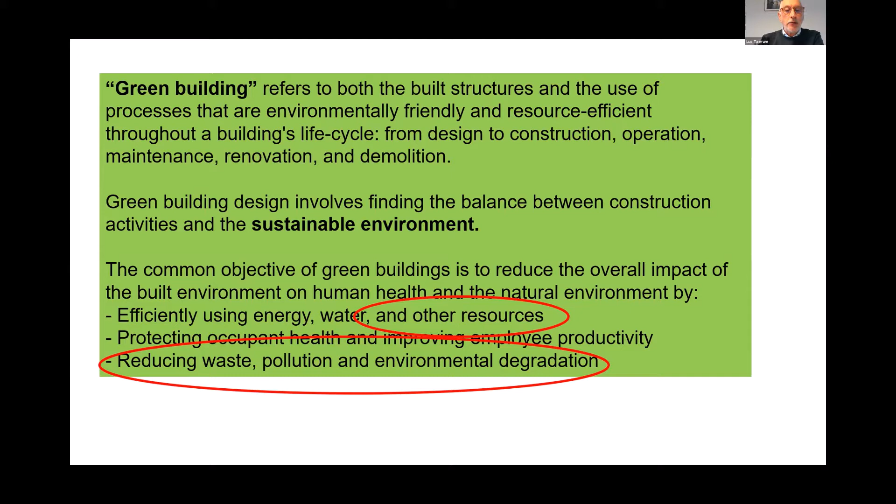Green building design involves finding the balance between construction activities and the sustainable environment. The common objective of green buildings is to reduce the overall impact of the built environment on human health and the natural environment, by efficiently using energy, water, and other resources, protecting occupant health, improving employee productivity, and reducing waste, pollution, and environmental degradation. I will focus in my short presentation on the efficient use of other resources and on reducing waste, pollution, and environmental degradation.

We must see green buildings in the sustainability framework, characterized by the so-called triple P concept, where the first P stands for planet or the ecological and environmental aspects, the second P for economic aspects, and the third for social aspects, because every measure we take has economic and social consequences. So that's what I mentioned—finding a balance between these three aspects, which is not so easy in many cases.

I also want to refer to the Sustainable Development Goals defined by the United Nations in 2015, three of which can be related to construction and infrastructure. Number 9 is about industry, innovation, and infrastructure, stating: build resilient infrastructure, promote inclusive and sustainable industrialization, and foster innovation.

Regarding sustainable industrialization in the construction sector, for almost 5 years we have established a Belgium-China joint laboratory for industrialized construction. This is a joint effort between Ghent University, Tongji University in Shanghai, and Shanghai Construction Group.

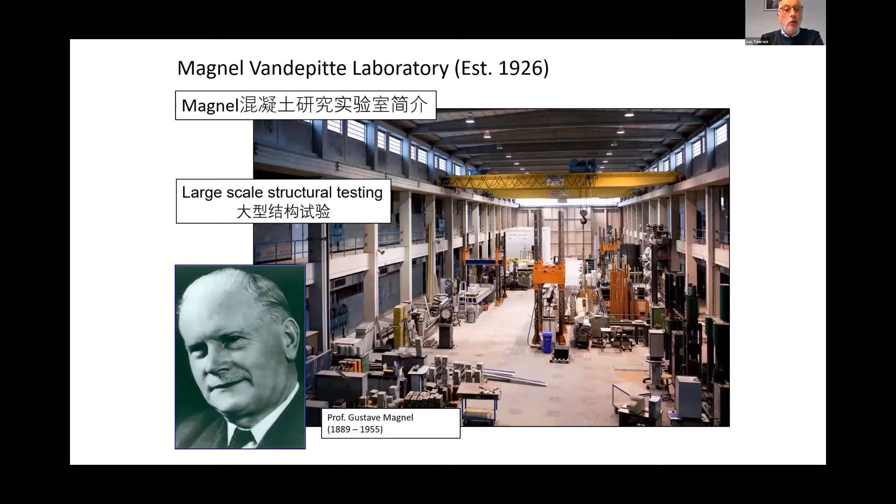At Tongji, this is mainly linked to the State Key Lab of Disaster Reduction and Civil Engineering, where they have huge facilities for large-scale structural testing. The Shanghai Construction Group is the biggest construction company in Shanghai, and was involved in the construction of most high-rise buildings, bridges, tunnels, and so on. Then there's our Magnel lab at Ghent University, where we also have large-scale structural testing facilities, as well as material testing equipment and so on.

Then the number 11 goal is sustainable cities and communities. It states: make cities and human settlements inclusive, safe, resilient, and sustainable.

What's a shock? This can be a structural accident, such as explosions, impact, or natural hazards like earthquakes. But you can use these concepts also in a wider sense. For instance, in a social environment, we can have a pandemic that occurs suddenly.

Then we have to look to the recovery - that's the resilience. How do we get back to the post-shock quality, which can be the same as, higher, or lower than the pre-shock quality. We have to look to the recovery time, linked to the rapidity of recovery. There are structural measures we can take that increase redundancy, with more investment in the system, and in this way we can reduce vulnerability.

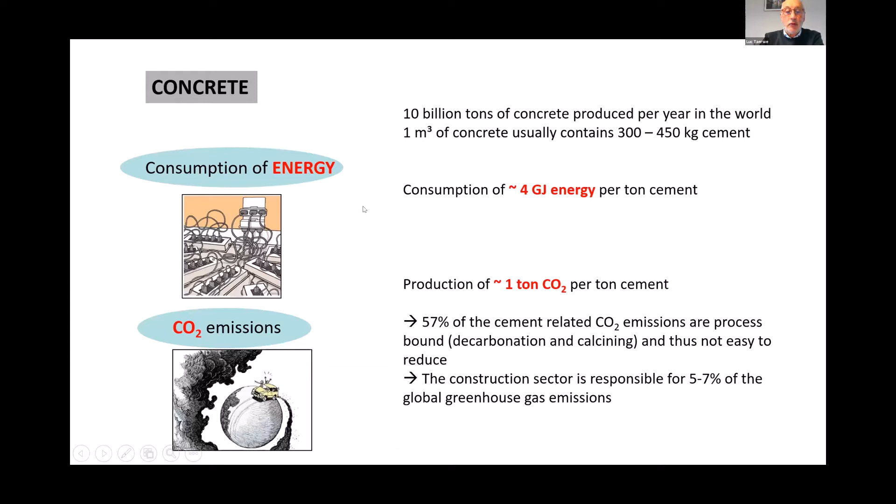So this is a huge challenge for the construction industry - not only cement, but the aggregates we use to make concrete. There are 3 billion tons of aggregates produced per year in the EU, and only 6% are recycled. This means the construction sector uses 50% of the Earth's raw materials. As for waste, 850 million tons of construction and demolition waste are generated in the EU per year, and the construction sector produces 50% of the Earth's waste.

Now, how can we deal with this problem? There have been many attempts in recent years to produce, for instance, high volume fly ash concrete in order to reduce cement. Geopolymer concrete, for instance, is concrete where no Portland clinker is used anymore. There's also the use of recycled aggregates, and self-healing concrete, where the principle is to extend the service life.

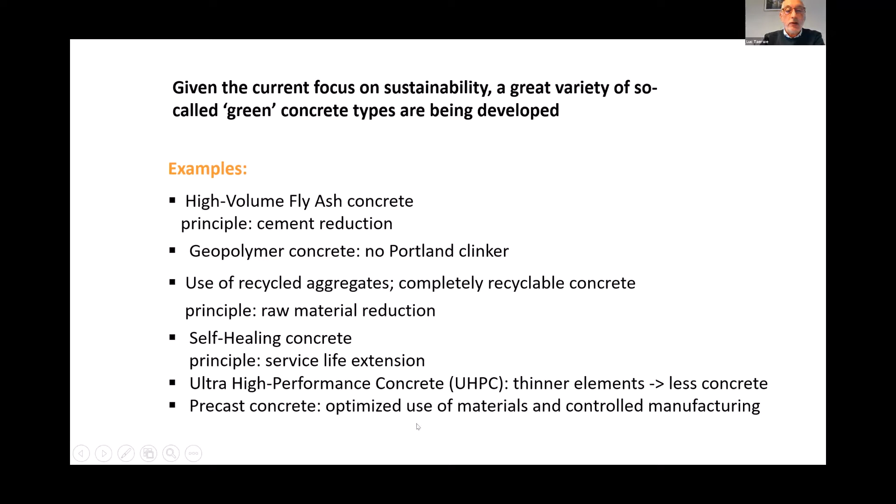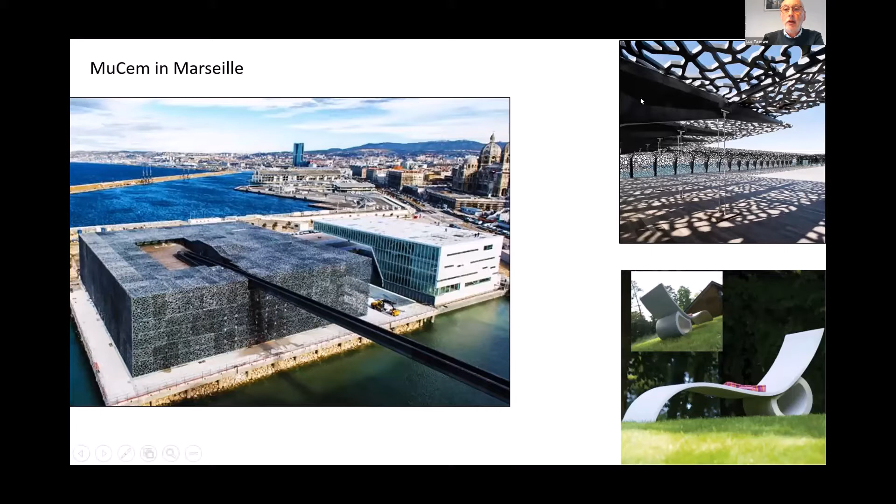Also in Belgium, we already have a couple of applications. For instance, this is a small pedestrian bridge near Brussels. This is a railway bridge in Germany. And perhaps some of you know MuCem in Marseille, where you have this filigree structure, which is really very nice.

Use of recycling: nowadays a lot of recycling waste, concrete, and so on is reused as recycled aggregates. The International Federation of Structural Concrete has recently published a sustainability statement focusing on materials, structures, construction, conservation, dismantlement, and reuse.

For instance, here you see an example: a bridge beam recently produced in Japan, where 150 megapascal strength is used, but there is no cement at all in this beam. So you see that practical applications are really possible, and we can achieve sufficient strength.

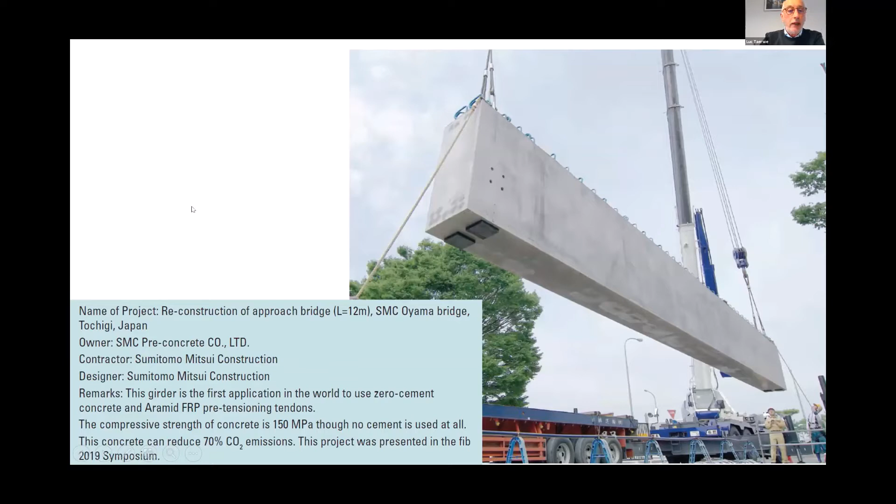Also, precast concrete contributes to sustainability. Here you see a complete overview. I'm not going into the details, but this makes me conclude that there are several possibilities nowadays to really produce environmental concrete structures. There's still a lot to do, still a lot of research, but we see these new materials and new techniques finding applications in real projects. Thank you for your attention.

Thank you very much, Professor Taerwe, for the very nice explanation of the scientific background of green building and the various green construction materials, and for your continuous contribution and dedication to the collaborative work between Belgium and China in the construction sector. Our next speaker is Professor Meng Tao from Zhejiang University, also Deputy Secretary General of the Special Committee for Construction Solid Waste of the China Silicate Society. His primary research concerns advanced materials, recycling in construction, and the durability of concrete. He will present the 10 years of cooperation between Zhejiang and West Flanders in recycling and reutilization of demolition waste. Professor Meng, I give you the stage.

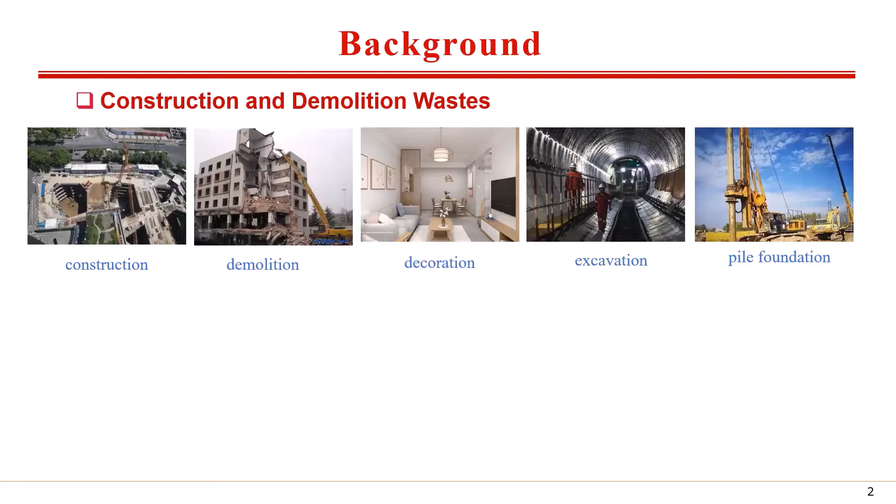As we all know, we need to conduct different kinds of engineering to make our lives better and more comfortable. However, we also bring about a huge amount of different kinds of wastes. How to treat those wastes is a big problem all over the world.

Let's first look at the situation in Flanders. The whole amount of construction and demolition waste is about 14 million tons per year, and there are 285 certified recycling installations, including 4 different treatment methods. This makes Flanders a world leader in recycling in construction, with a recycling ratio achieving 98% now.

But the situation in Zhejiang is quite different. We investigated the production of construction and demolition waste in 2016. The whole amount in Zhejiang is about 800 million tons per year, and the amount of above-ground structural waste is about 180 million tons per year - more than 10 times that of Flanders. The aggregate supply and recycled products market is quite immature, which caused the recycling ratio to be only 10% in 2016. Now it's about 25%, much less than in Flanders.

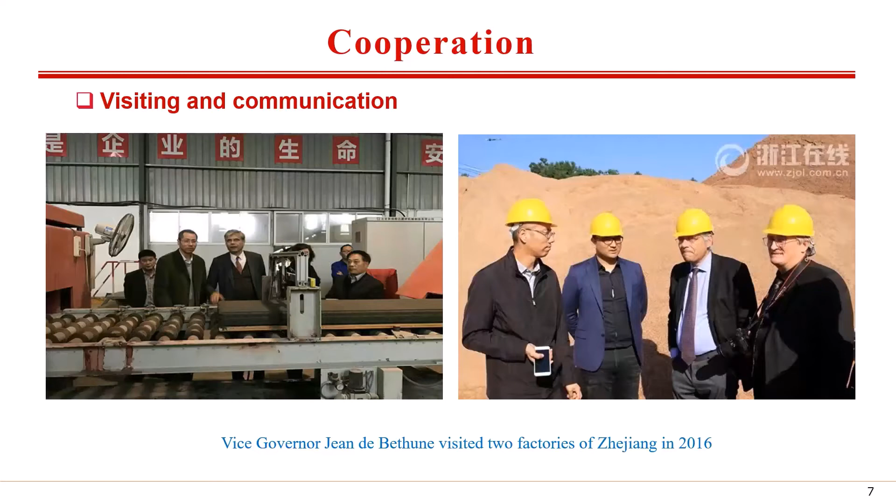In China, treatment for construction and demolition wastes started to draw attention from the government and society. Thus, the second delegation came to Belgium and visited more universities and industries, discussing with professors and managers, and started to think about real cooperation on recycling between our 2 provinces. We all think a relevant institute is necessary.

In November 2016, Zhejiang University and KU Leuven held a conference applying for the Institute on Recycling in Construction. The governor of West Flanders and the Belgian ambassador to China attended this conference and recognized our application. Then the preparation for this institute was written into the memorandum between the two provinces at the end of 2016. This is the meaning of PROR2, the institute we want to set up for recycling of construction and demolition wastes and other industrial residues in construction application.

In October 2017, 4 Belgian universities and 3 Chinese universities signed a memorandum for the establishment of the Knowledge Institute for Sustainable Economy between Zhejiang and West Flanders. PROR2 is one of the 3 main parts.

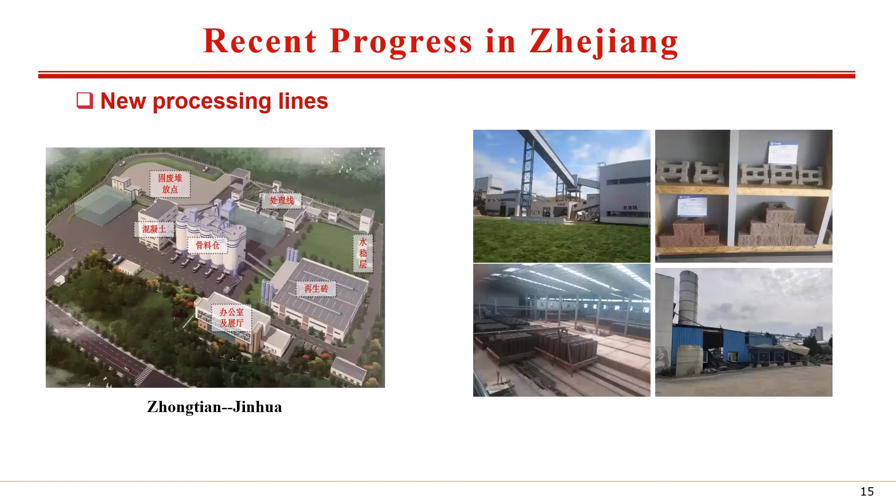This new factory located in Jinhua City has a complete set for crushing construction and demolition wastes, producing recycled aggregate, recycled concrete and blocks, and cement stabilized recycled materials.

This line is dealing with decoration wastes in Jiaxing City. We can find there are many plastic bags, ceramic tiles, wood, and other impurities inside. This greatly increases the difficulty of treatment.

So finding a suitable recycling method in Zhejiang is a new research item. The Department of Science and Technology of the 2 provinces decided to support relative research in this area, and we succeeded in applying for one. Our project is concentrated on mixed recycled aggregate, to study key technology of resource recycling and conduct demonstration applications.

However, mixed recycled aggregate is normally very weak and highly absorbent, so we need to find an effective method to strengthen this kind of aggregate. In Zhejiang, we use nano technique. We call it nano enhancement.

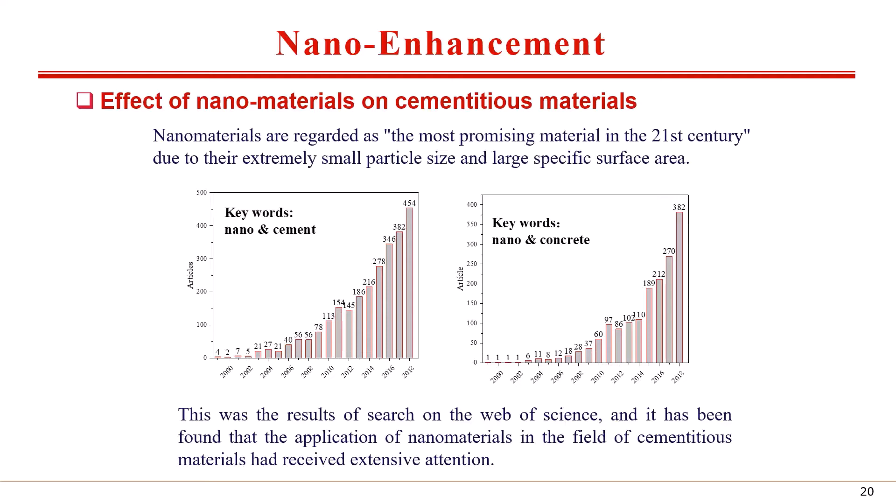In recent years, nano cement and nano concrete have drawn close attention worldwide, and we can find rapid growth in this research. From this we can see different kinds and properties of nanomaterials could cause different effects on cement and concrete. However, the mechanism still focuses on the filling effect, high activity, and the seeding effect of nanomaterials. We need to conduct further research.

We found the compressive strength of cement paste is linearly related to the orientation index of calcium hydroxide. Thus we propose a new mechanism of nanomaterials, the debunching effect. Some detailed results will be published in the near future.

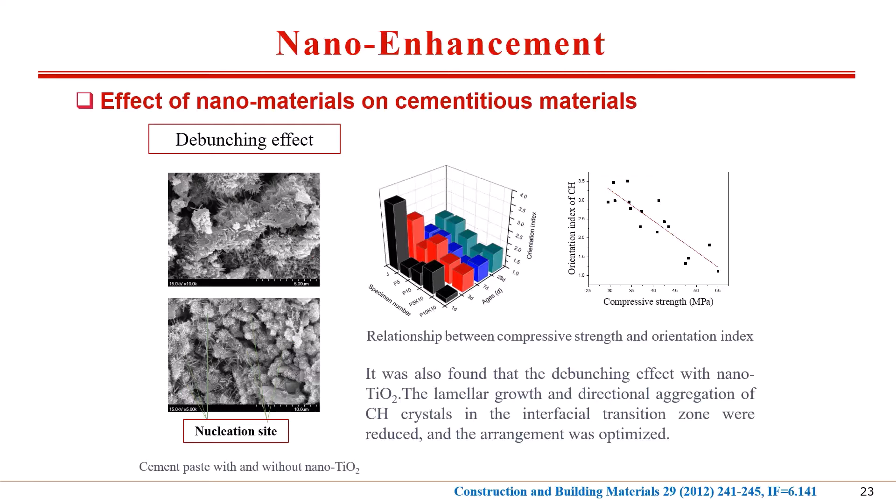We also conducted quantitative XRD experiments to find the change of composition and content of minerals in clinker and hydration products. We found this is quite different for different nanomaterials. Then we proposed the hydration model of nano-modified cement.

Based on this research, we started using nanomaterials to strengthen the recycled aggregate. 3 different nanoslurries were used in this experiment, with total solid content of nanomaterials at 2%. We found the crush index and water absorption decreased.

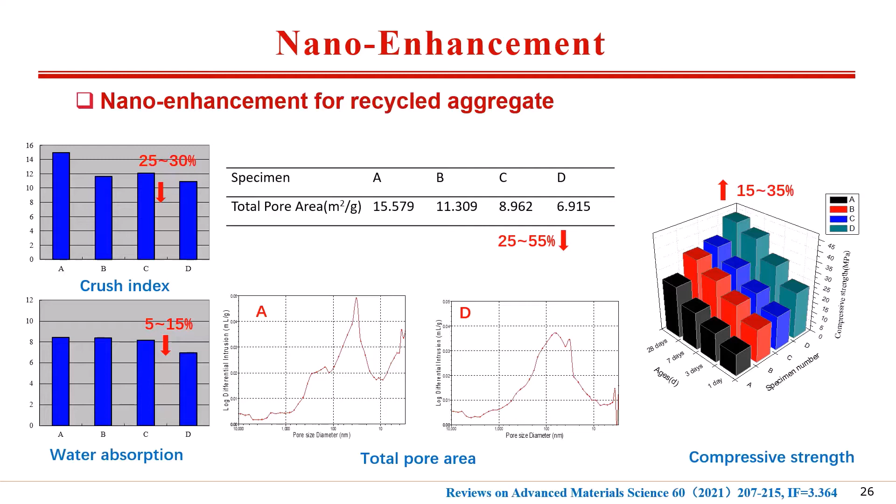The reason for these results is that the pores could be blocked by nanomaterials and hydration products from nanomaterials and cement. Thus the total pore area decreased sharply and the strength increased. This slide shows the mechanism of nano enhancement.

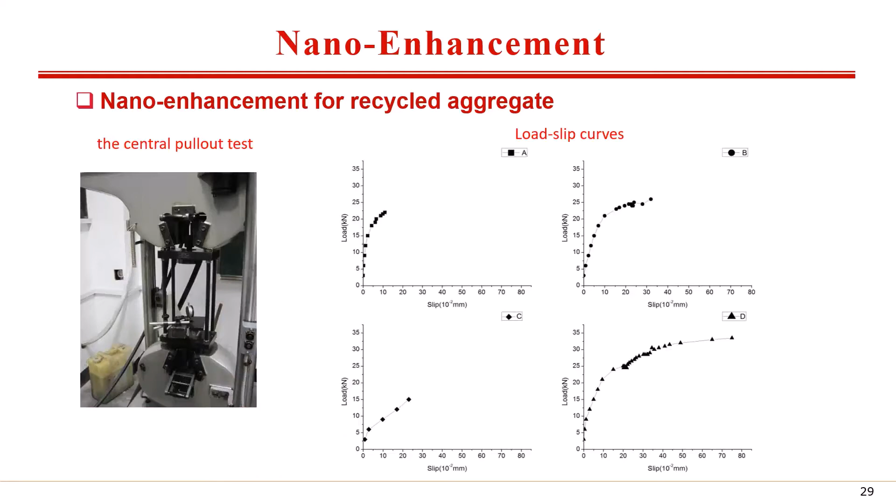Some structural properties were also investigated. We found the force and moment of the beam could be increased after nano enhancement, and the load-slip curves showed obvious difference from the control test. This confirms the effect of nano enhancement.

Now we use nano enhancement in many areas, for example high strength recycled blocks, recycled concrete, high performance recycled concrete, marine recycled concrete, and so on. That's all for my presentation. Thank you for your attention.

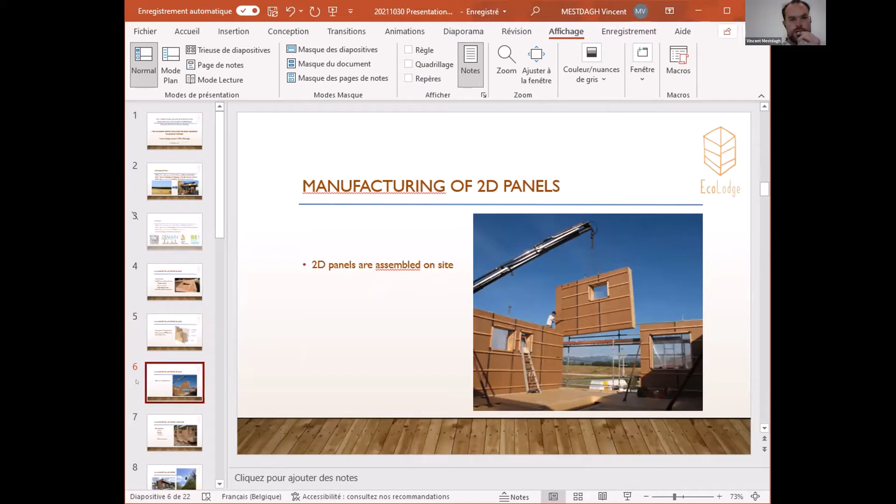What my company makes within the plant are modules, which we call 3D modules, three-dimensional modules. In this case, the waterproofing is already installed on the roof, the cladding is already installed, the windows are already installed, and sometimes we also install the kitchen and bathroom and other elements. Those boxes are shipped to the job site by truck, or by train to move them so we can assemble them on site. It's very fast, and the big advantage is that the straw and wood never get in contact with water.

Depending on the model, it takes between 15 and 60 days to manufacture the 3D modules. On the job site itself, we need one day to make the foundations, and another day to assemble all the modules together. So basically, in the morning you have nothing, and at the end of the day you have a building there on the job site. If it's not installed in advance, other contractors are welcome to install the kitchen, bathroom, and partition walls within the building.

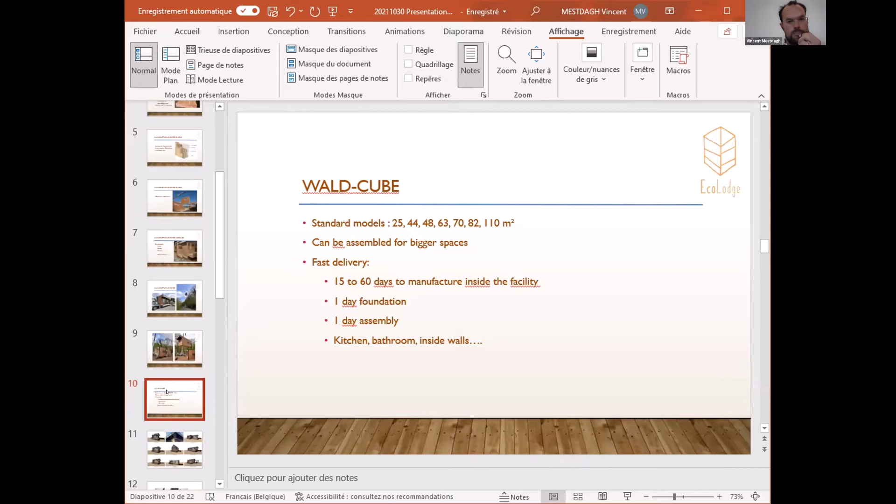This is a general view of our main models. You see we can put them together to make bigger spaces, and the smallest one, we call it the 25.

This is another one. This is a doctor's office next to his house, which is the model 30 because it is 30 square meters.

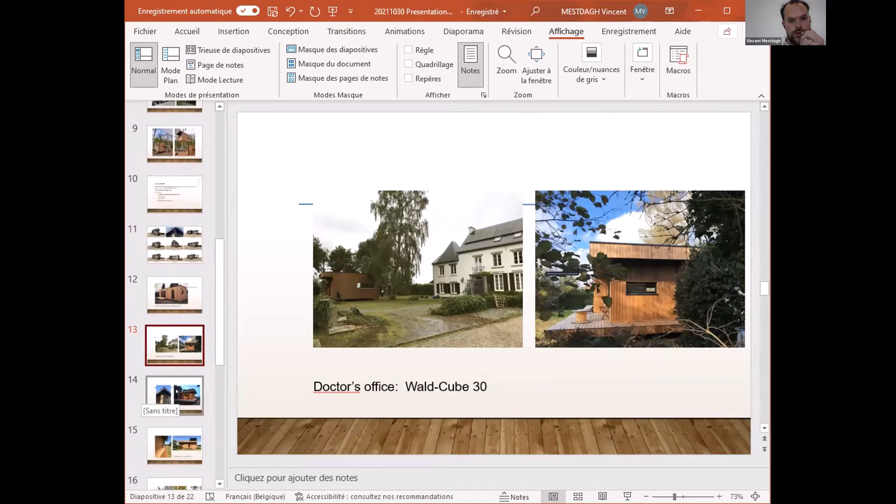This is a vacation place and the surface is 44 square meters.

This is a training center, a bit bigger.

This is a single family home which combines two sizes of Wald-Cube, 82 and 25.

This is a vacation village that counts 22 units and are all made of Wald-Cube 44.

And we work on eco districts, which is becoming very popular, where people want to enjoy a smaller place to live, a very green place, and also share maybe crops they can grow together, and they share cars and so on.

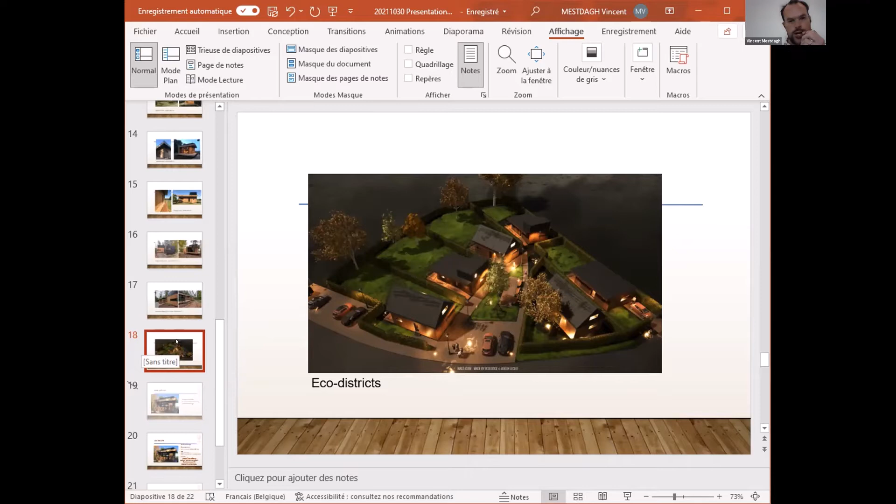So at the end, what we offer are net zero energy buildings made of green materials. Wood and straw are the main materials.

And not only are they green, but they come from very close by. So 95% of the materials are coming from a distance lower than 200 kilometers.

And wood and straw don't need a lot of energy to be ready to be used as building materials. Moreover, they can be used as CO2 reservoirs.

Another very interesting feature of those modules is that 95% of it is reusable for new buildings. We have done that for centuries in Europe, to reuse wood mainly for roofing, but also sometimes as structural elements for some smaller buildings.

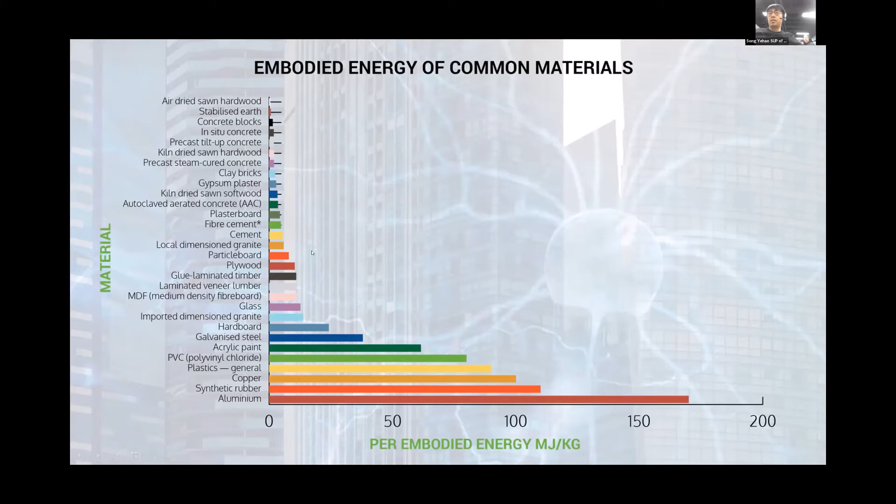In ancient China, we sometimes pay much attention to the harmony of mankind and nature, which means not all buildings must be necessarily enveloped. So we have open space, open view, together with nature, and bamboo could play an important role in that field.

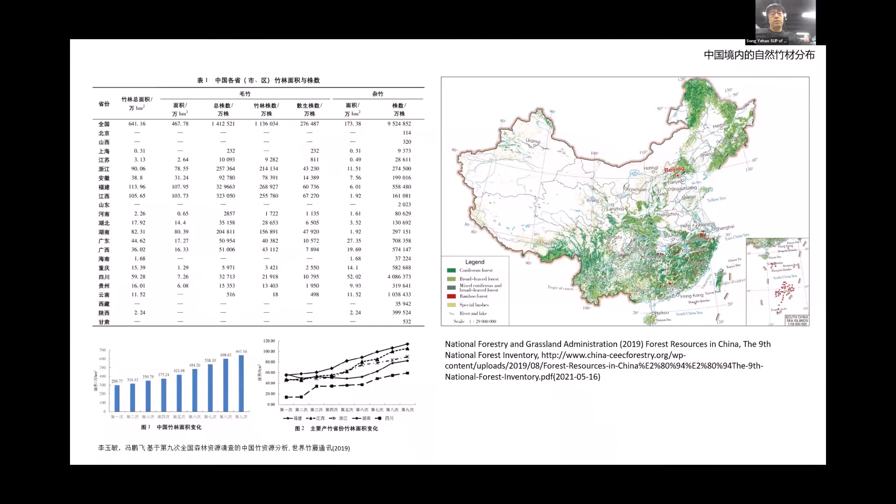That's the distribution of bamboo resources in China, some microscope research on bamboo as a material, and also a lot more ways for bondage, for bond and for joints of bamboo.

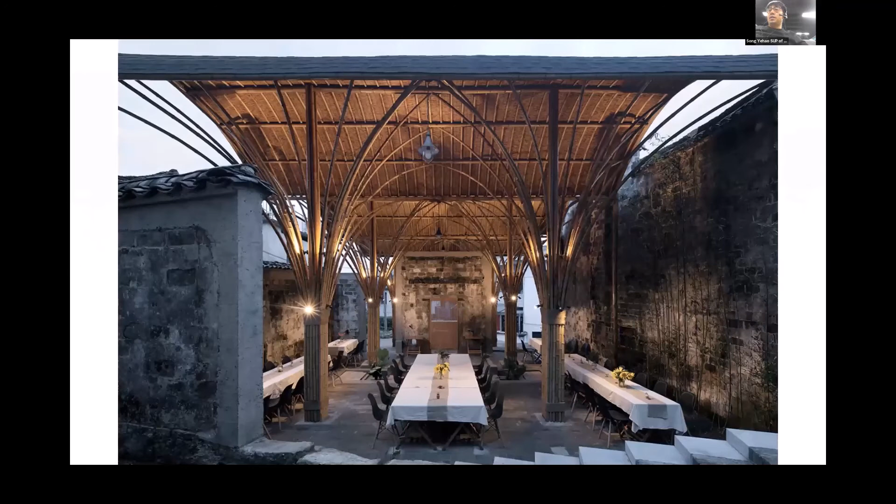The first case for us is what we call the village lounge, for villagers to do something together. It's a retrofitting project on a totally abandoned family house. With bamboo, in a very short period of time, we provided villagers with something they are really fond of, and thanks to their devotion, the villagers are not only the owners but also the builders of this small project.

So this was the first time we tried bamboo as a construction material, and we came to understand some principles for bamboo as a construction material, and also both its advantages and disadvantages.

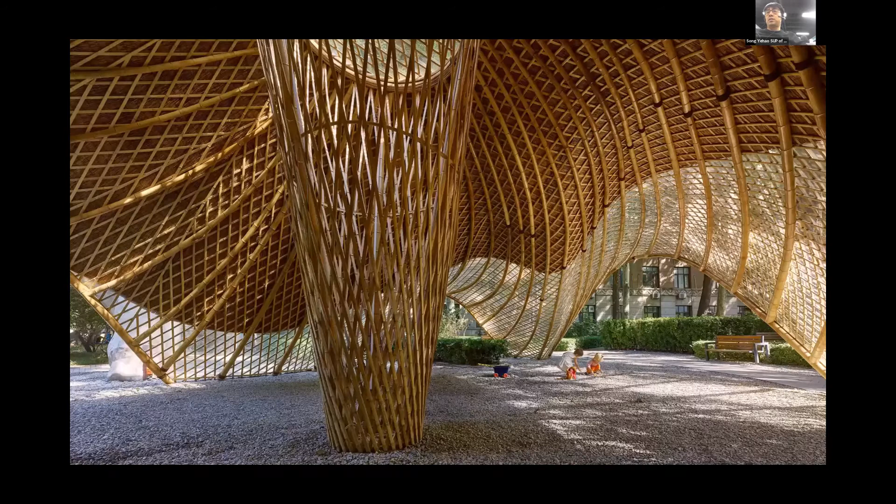After that, we have another small pavilion in Beijing, at the Beijing Forestry University, not far from my university. It's a kind of information pavilion, and a lot more events could be done there, for opening ceremonies and also for daily life of old people and their grandsons and daughters, and also for students and professors in that university.

We have a lot more architectural thoughts, but that's not the particular point for this presentation. We pay much attention to the environmental factors of the surroundings, like the acoustics, the accessibility of the building, and also the context—we call it urban context, the whole thing around it. We did a lot more research, architectural way, and after that it's something like that.

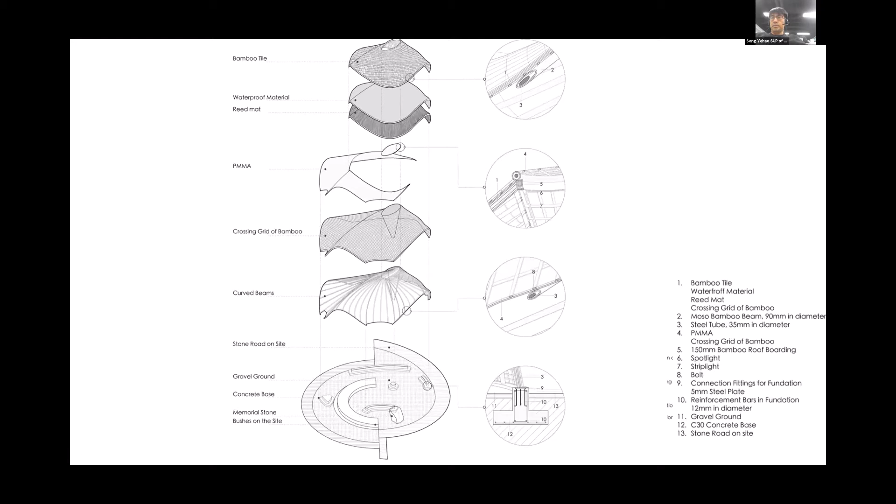We do a lot more research on the joints. Talking about joints, we're trying to connect each and every bamboo with a traditional way and with a modern way, with the help of nails, and do the analysis for the displacement of the elements, trying to combine something modern together with something traditional—which means the craftsmanship—and also the events that were going on there.

Kids definitely are fond of this pavilion. They can exploit the extremes of the building. They love that place for sure. Students also, and elderly people together with their grandsons and daughters, all in a tranquil atmosphere.

After that, one of the latest bamboo projects of our office is the tea market in Fujian. Fujian is famous for at least one thing, the tea market—a lot of teas come from that place. In architectural context, it's also very famous for rammed earth buildings, traditional rammed earth construction, and maybe it's something special, but the structure of bridges there is quite particular, built with timber in the traditional way. So that's the surrounding context.

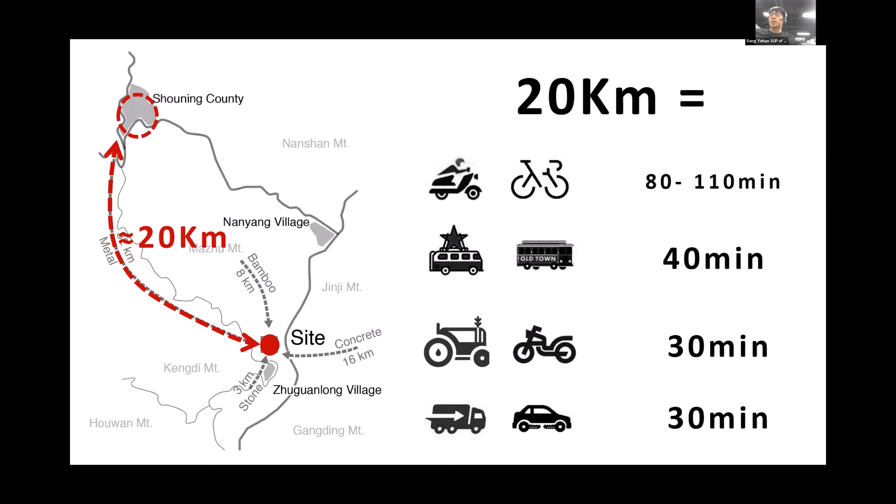We're trying to find everything within a limit, which means 20 kilometers—we try to source materials less than 20 kilometers away. We found the rammed earth just surrounding, not far from the construction site, and also the traditional Chinese timber bridge very near to the site.

Talking about rammed earth, it's something with very low embodied energy and a long history. We did reuse research on that, on abandoned houses with timber, and we made full use of them again in the building, and also reused abandoned broken stone plates, a kind of waste. We did a rough calculation for the life cycle material and carbon emissions, trying to find loops for every material.

Another thing, last but not least, of great importance, is the craftsmanship. We ask local people to do something for themselves, which follows all the principles of our design. So they are doing something for themselves.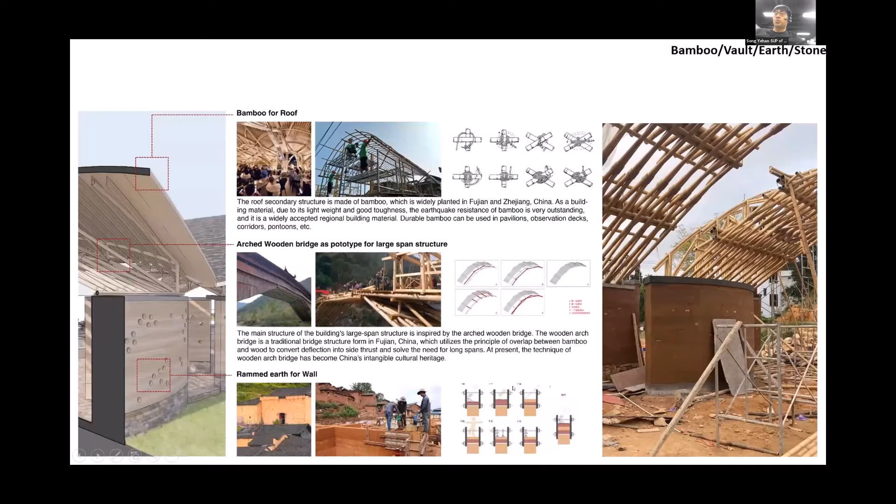It could be a tea market under a vaulted bamboo roof, which learned much from the traditional Chinese timber bridge. And again, the joints, the coverage for that, traditional craftsmanship for the rammed earth, starting from reuse of the stone, and then local people doing it for themselves.

Two workers could make a wall in two days. That's quite fast. They're doing that for themselves with joy.

That's the timber bridge nearby, several kilometers away from the construction site. We did a comparison with the rainbow timber bridge, and also Leonardo da Vinci did something for that system. That's a traditional Chinese system—the old timber bridge with hundreds of years of history.

Rainbow. Chinese must understand the significance of that traditional Chinese painting within the capital city of the Song Dynasty, with the rainbow bridge made of timber.

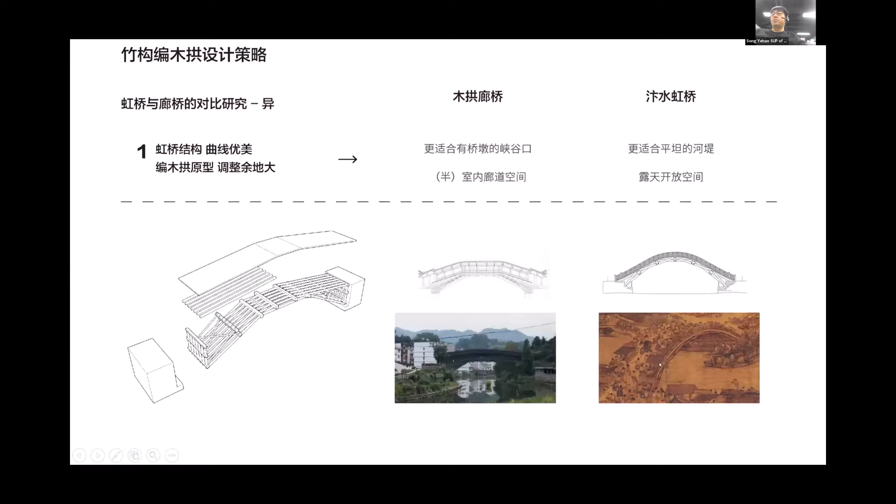So we learned something from that and tried to do a comparison with the traditional timber bridge and the rainbow bridge, and then did a lot more analysis and design work for that.

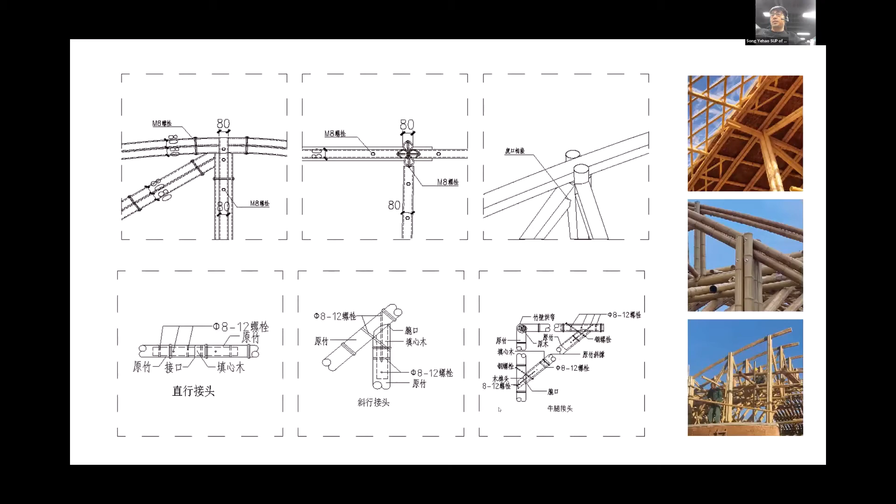And finally we have our own particular woven bamboo bridge. It's not for a bridge, just for the coverage of a huge span, so it's kind of a roof. We did the detailing, joints, detailing design, and under construction we did experiments to test if it works or not.

After a very short period of time, 30 days or something like that, the tea market was done, finished, accomplished. So that's a rendering for our research, and gradually done. That's the reality after accomplishment.

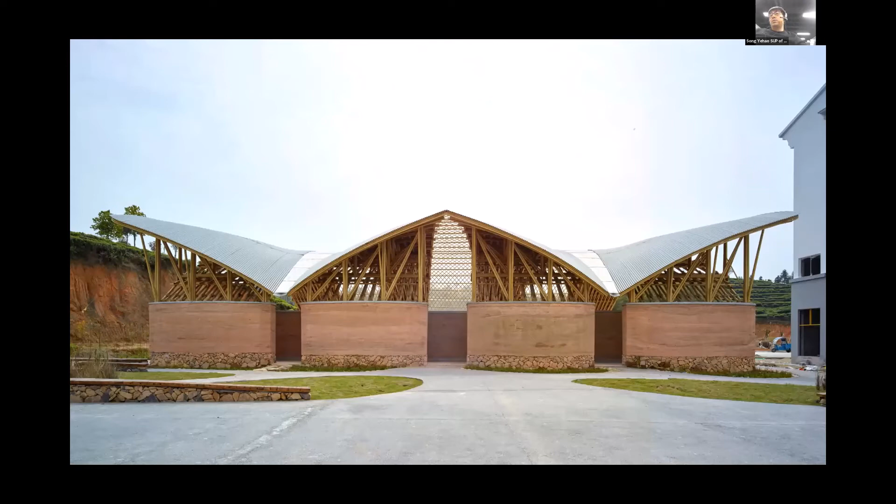And also for users less than 20 kilometers away, we are doing something for local people, not for tourists only, but also for local people. Why should they not enjoy this kind of thing? So we did a lot more research and investigation into local people's habits, hobbies, and also events and festivals, and tried to provide some kind of multifunctional space for them.

So it could be something — that's the vision. It could be a cinema for movie night, could be a grocery for daily life, and could be a tea house for everything.

That's quite special, they have this kind of feast. On a particular day, each and every family will provide dishes and just move to the street, and they will invite all the guests or villagers to enjoy their dishes.

So after the accomplishment of the tea market, they have a regular place. It could be against the sunshine, against the rain water, or whatever might be disturbing.

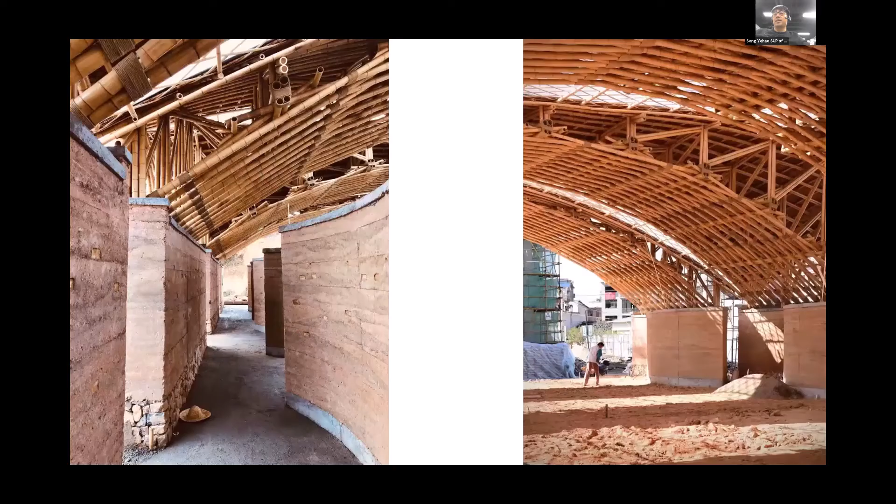All that's under construction, during the construction course, and local people, the villagers, are curious about the material, bamboo.

Terrazzo, yes, on the ground. Terrazzo is part of the reuse of the broken stone plates. We knocked it again into small pieces and then made it part of the terrazzo, so it's a kind of dark red color, which is the color of the stone.

And also another part of the broken stone plate is used for the pavement.

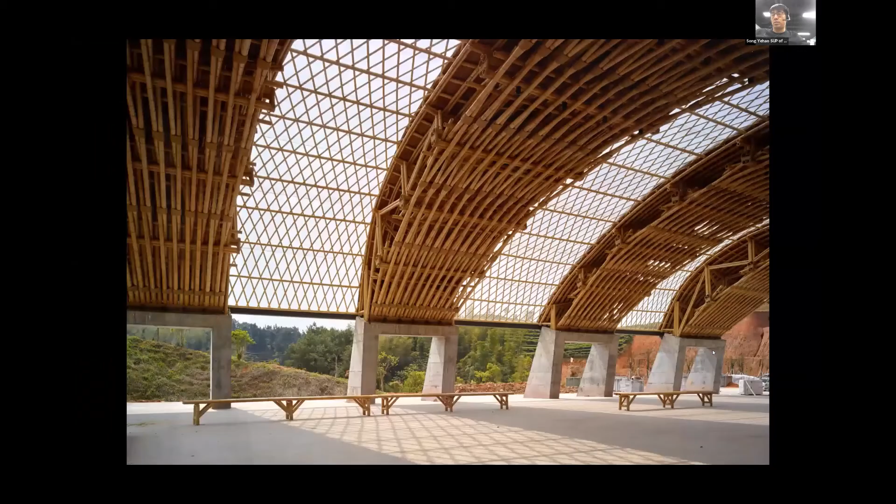Rammed earth wall — we inserted several timber pieces inside of the wall to make it possible for the villagers to nail something onto it, because rammed earth cannot bear the load, but the timber can. So that's a side of the building.

Or reuse of the abandoned timber for landscaping, for stools, for chairs.

Yeah, you can see the terrazzo.

And we do have a lot more architectural ideas and concepts, except for the structure system. We did a lot more detailed research to try to make it more elegant, more — even I would use the word beautiful. It's not common for an architect to say something like beautiful, but we are trying to do that.

Very elaborate thought. Yes, that's at night. Even for lighting, we invited the top consultants in China to do something for the local people.

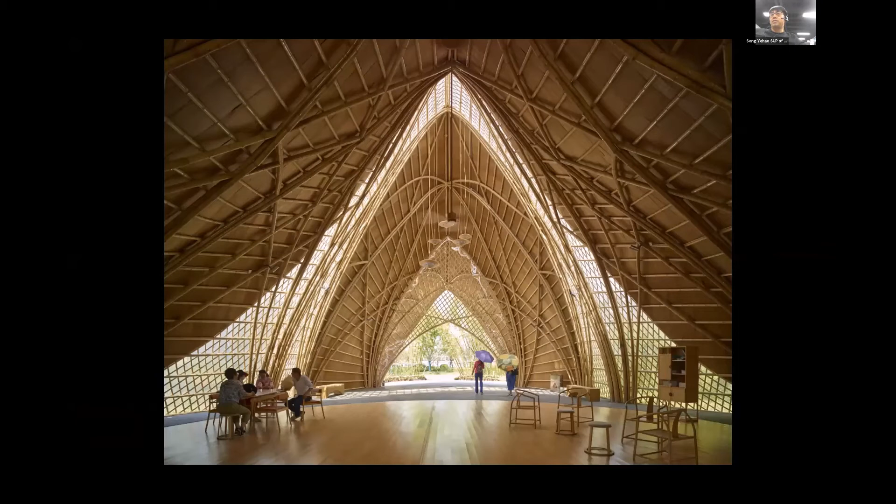And the Imba Pavilion is the last bamboo project for our office. It's a kind of small pavilion for an expo in Yangzhou. We made it look like a fish — fish means something good for Chinese people, so we tried to make it something that could be used for a wedding or a kind of ceremony. It could also be a multifunctional thing.

Yes, we also did a lot more comparison for the structural system and for calculation, and after that we tried to finally make up our minds to find one optimized solution for that.

Just a displacement or a lot more terms for that, but that's not the most valuable part of the design — it's the comparison, you know, always painful to make up your mind for a design.

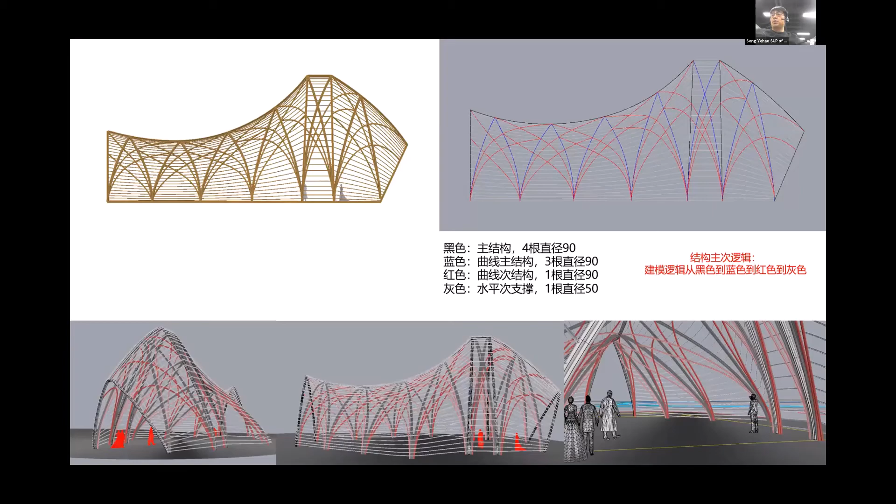That's also kind of the joints and design part, and you can say the size, the dimension. That's an adult, maybe 1.7 meters, you could say.

Professor Song, very nice presentation, but yes — you have half a minute left.

Yeah, I'll just go through slides. Okay, thank you, thanks, because it's something very easy to understand.

So, okay, another one is about bridges — just slides. It's also for villagers, for local people, even for relatively poor people. It could still be something sustainable, depending on the intention of the design and the sake of beauty.

Okay, that's all. Thank you. Thank you very much, Professor Song. It's a very, very nice presentation. It's really great to see the beautiful and very artistic bamboo structures. I wish the audience and myself will have the opportunity to see more in the future. So thank you very much. Yeah, thank you, thank you.

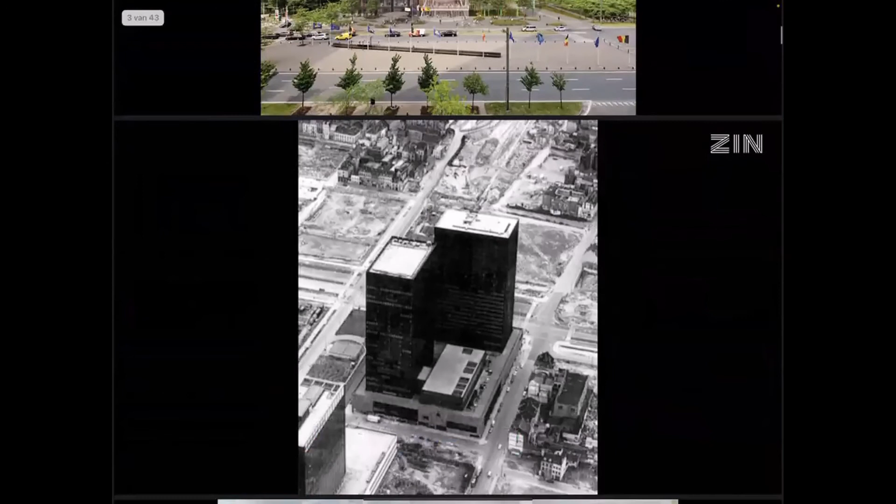Yeah, this is actually the perspective of the building on which we are involved today. It's under construction, this is a rendering of the future project. We are actually in the high-rise district next to the city center of Brussels, and it has been one of the first high-rise towers in the 60s, in 1960. So this was the former World Trade Center in the city center of Brussels. And this is a photo of when it was constructed 50 years ago.

And it was actually part of a bigger master plan and an American vision for Brussels to start constructing towers in a high-rise district. And today it's evolved into an area with a lot of towers next to one of the most frequented train stations in Belgium. It's been an area in full transition.

There is something going wrong with the text, but I will explain. The area was for a long time an area with monofunctional office blocks. It's been an area with a lot of governmental administrations, and it's been regarded as an area with not a lot of life in the evening when people in the offices are gone.

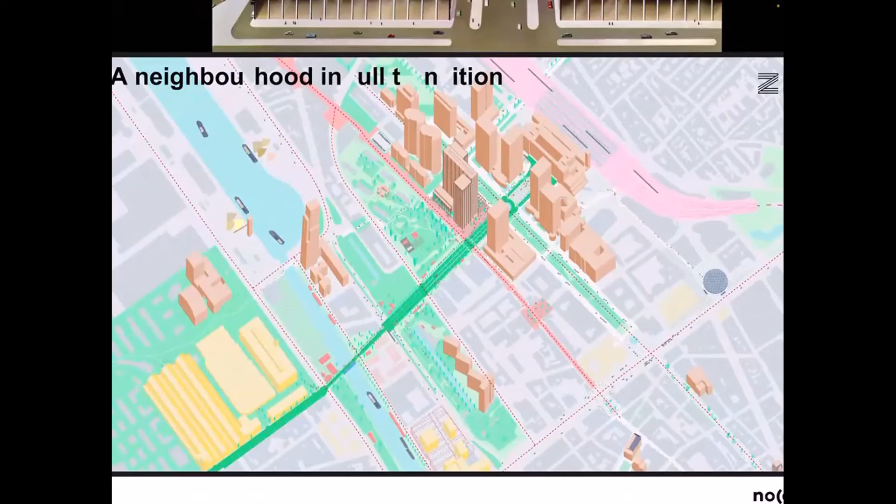So the interest of the city and the local community today is to bring life with new projects, with a mixity of functions in those new buildings. What was really nice was that our client invited us, a whole team of local experts, to think about what the future of this new development might be. They actually invited us into the existing towers, the towers from the 60s, to think and develop new ideas for this project.

So we came up with this idea to bring more of a mixed project, because before, the two towers were only housing offices. But in the future, when our project is finished, we will have of course the offices, but we will also house 100 apartments, 111, and 240 hotel rooms. And this way we think we might create life in this area, in this quarter, also in the evening, at night, early in the morning.

So this is actually an axonometry. On the left you see what was there, and on the right you see our new project. Instead of just demolishing the existing towers, we really studied and looked at all the materials we had on site. We wanted to bring a new project but without demolishing what was there. So we wanted to be very conscious with the bank of materials, so to say, and try to do something with them in the future project.

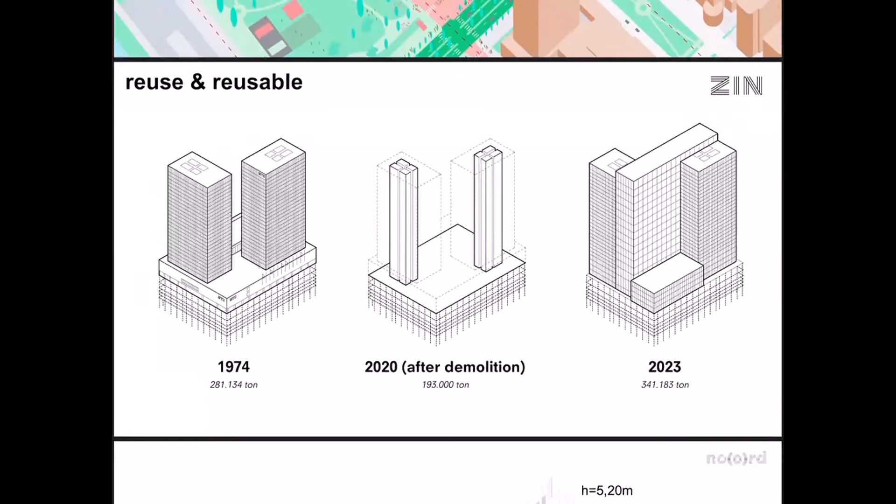So we came up with this idea not to really demolish the foundations, to keep the existing structure underground in the parkings, and to keep the existing concrete cores, and to build the new project around them. This way we avoid a lot of traffic of demolished concrete leaving the city to be processed.

So we came up with this idea to connect the two towers, the two cores of the towers, with a new volume, a double height volume, which will house offices in the future, but a volume with a height of 5 meters 20. So in the future it can house also other functions than only offices, because we would like the building to be flexible and to be a structure which can be used and can evolve in time, and which can be inhabited by different various occupants in the coming decades.

And so actually we made an inventory of all the materials on site to try to give them a new life in the new project, while not wasting things which can, for example, be used in the future project or in another project. So like the aluminium, the concrete—you see here a photo of the floor tiles.

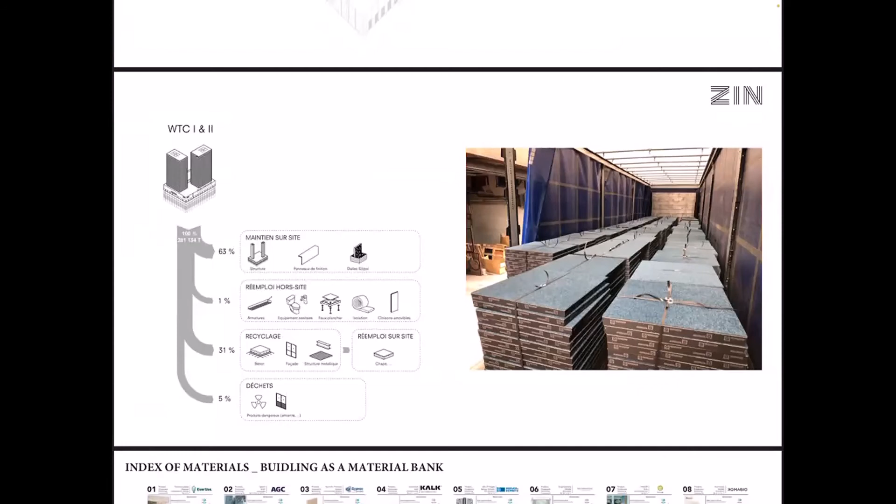This waste is like, for example, polluted materials we weren't able to reuse. We are also consciously selecting the new materials for the new project, because we really want to avoid there being any waste in the future. So we prefer to choose materials which can be easily demounted, which are dry, which can be adapted or taken out and applied somewhere else.

For example, this is a survey, showing the technical sheets of the materials. So the owners in the future will know exactly what is in the building, what is the value of these materials, and how we can use them.

This is a plan to understand the project better. You have the two existing concrete cores and then the new volume in between. And this is the plan of the apartments and hotel rooms, and a view of the model of the project.

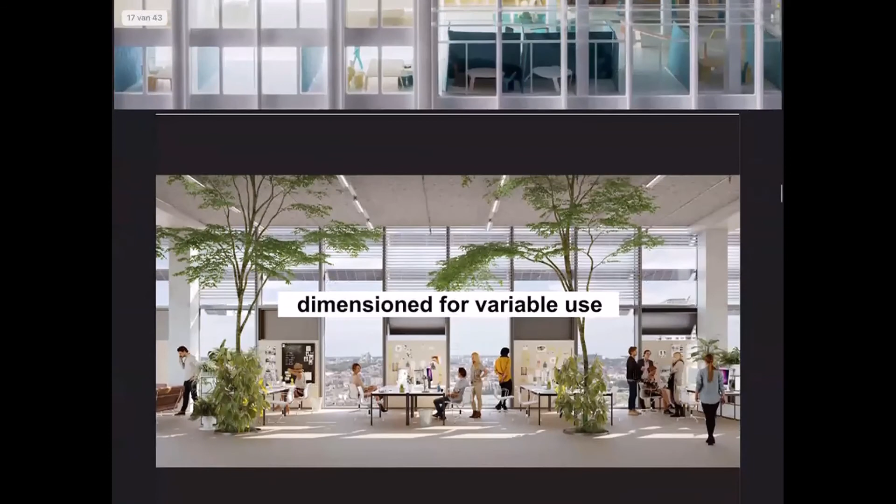This is a perspective of the central area, the double height area, which can house auditoriums, landscape offices, closed offices, maybe laboratoria, different kinds of spaces in the future.

What was also important for us was to invite greenery inside the office spaces here, for example. So there is this raised floor of 60 centimeters, which allows us to have living plants in the area.

Our client today has a very specific program, a client for the building today, but we wanted the building to be flexible in the future. So here you see some schemes with colors, the red color, for example, indicating the office function. But we wanted to design the building so that there is a certain flexibility. When, for example, there is less need for office space, we can easily adapt and invite inhabitants and change the function from offices to apartments.

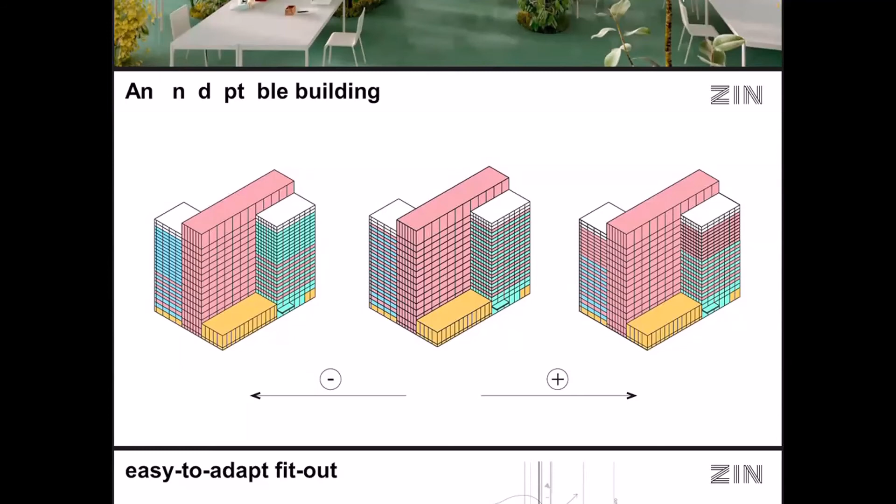This section shows, for example, how we only use dry materials which are specific to the functions. So to say, the raised floor used for the offices can be easily taken out, and we can apply floors or materials to house other functions. The curtain wall is designed with openable windows everywhere, but with a flexible modulation to easily adapt for the occupants. We avoided pouring or using materials which are not dry, which are more difficult to take away and adapt when the function of the occupants changes.

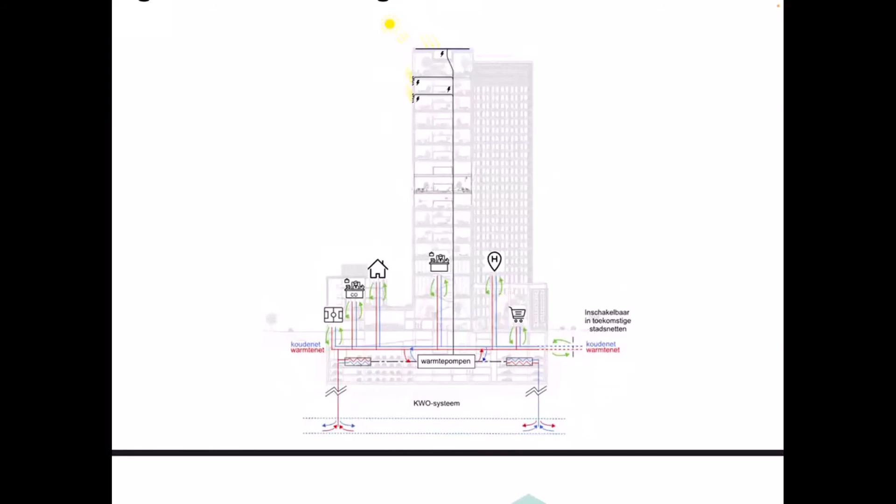Of course, the project is neutral in energy. We have geothermal pumps, we have solar panels, and there are technical installations which exchange warmth from the offices to the apartments in the evening, or the other way around, the warmth of the apartments in the morning to heat the offices. For us, it is evident to use all these new technologies to make the building neutral in energy, but we think it is more important to design a building to be flexible to house different functions in the future, and to really know the materials that are used.

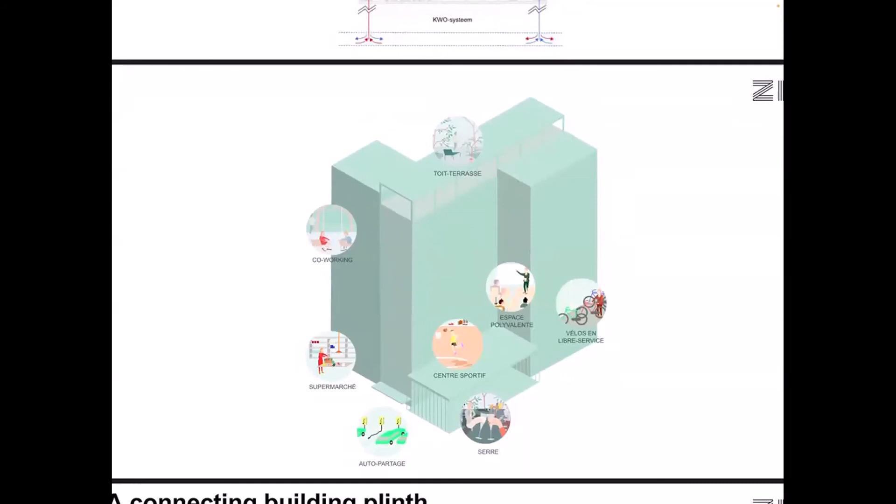This is a diagram showing that, given the different users, there are a lot of functions which can connect them. For example, there is this communal winter garden in front on the ground floor, sport facilities which can be used by the office users, but also by the people living in the apartments, or the visitors of the hotel. The spaces on the ground floor are designed to interconnect, so that all these users can connect, can meet, can easily interchange with each other, because we think it is really important to have a building plinth which is lively, where a lot of people can come together and meet.

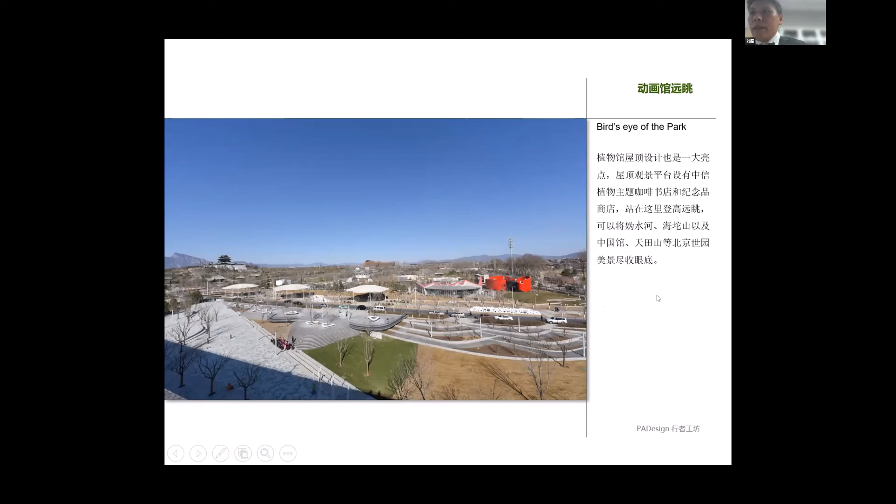And what I made is this little red building called CCTV Animation Pavilion. It is sponsored by CCTV Animation, an enterprise who made animations for Chinese children.

And this is the building. It's in a very, very kind, very friendly environment.

And the first phase is the design phase. It's located in the education and future exhibition area in the west of the expo. It covers 1,000 square meters of surface, but the building itself is little, about 368 square meters.

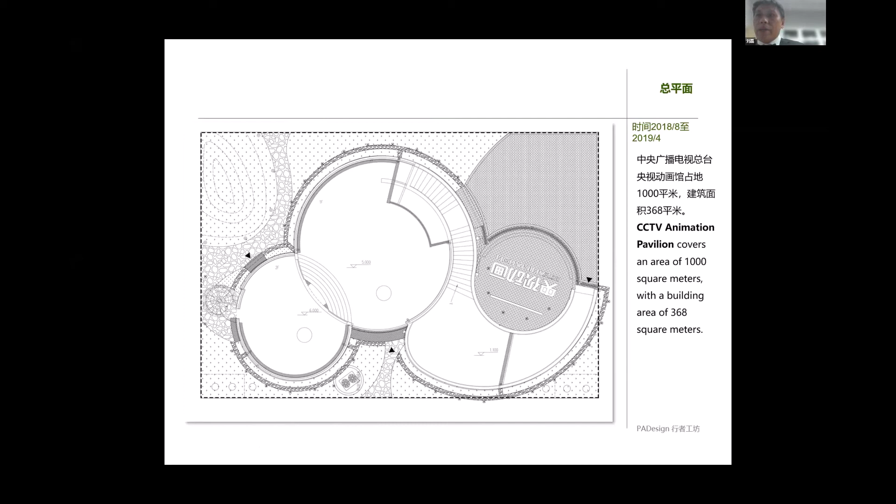The shape is pulled from the rhino model, and the shape is bold and restrained. The plan was obtained by intercepting the plan section from the proposed rhino model.

The wall curve is an irregular spline curve formed by free stretching, which is not conducive to lofting or to construction.

So we use a continuous curve with transition smoothness, formed by splicing circular arc segments, so that any curve on the plan has a corresponding center, radius, starting point, and end point, which is conducive to the operation of plan laying out and the accuracy of construction.

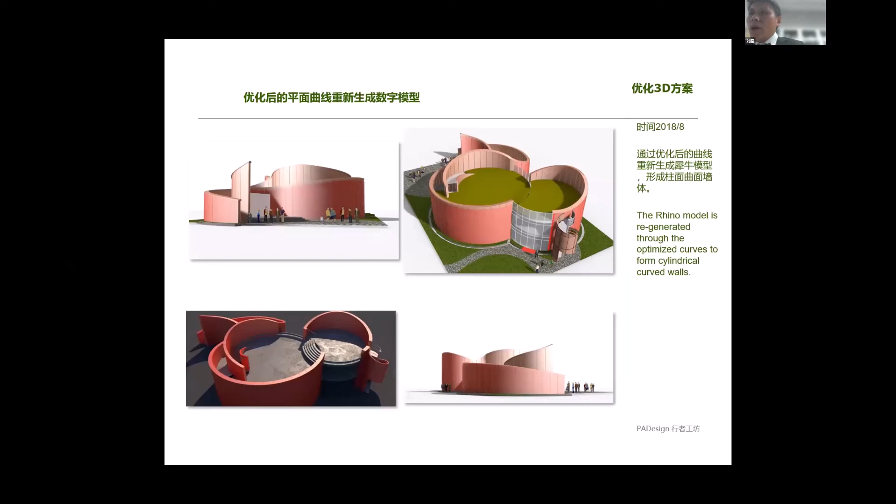And then we remade the rhino model according to the optimized curve. We also made a physical model to verify the observer's true perception of the future building.

And then according to the digital model, we redesigned the plan, and the steel columns, beams, and composite floor were rearranged. Then we put it in the rhino model according to the structure layout, with a detailed beam and column section.

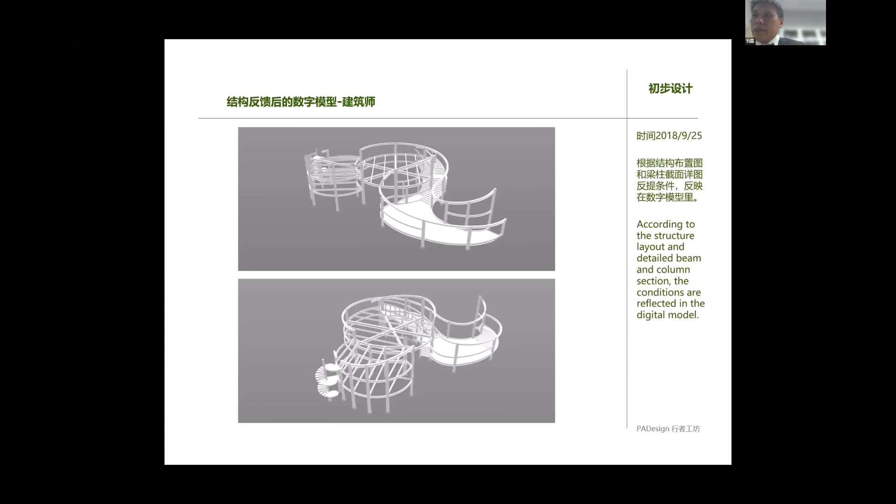The conditions are reflected in the digital model. And then we use Tekla, a model also established according to the digital model. The manufacturer processing drawing is produced according to the batch and delivered to the factory.

So Tekla is a universal software. And then we also delivered this model to the curtain wall design architect, who is majored in designing the curtain wall with aluminum.

At the same time, we also did the design of the outer curtain wall, which is a wind bell blade.

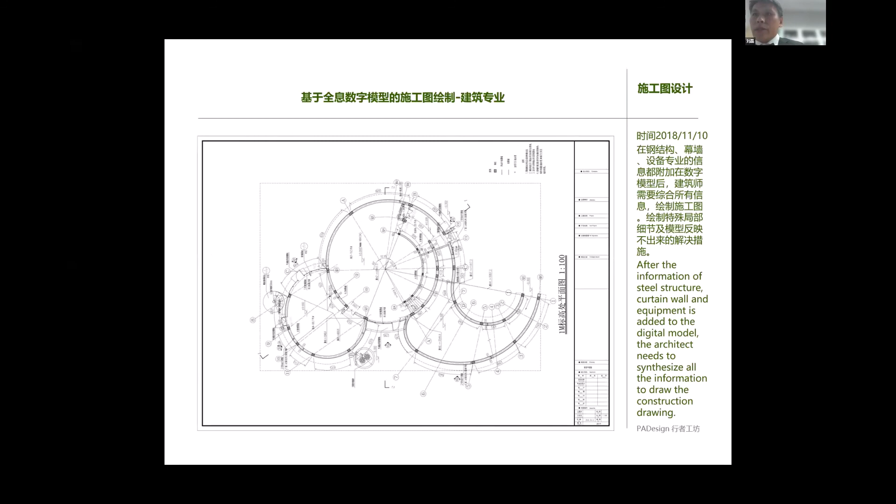After the information of the steel structure, curtain wall, and all the equipment is added to the digital model, the architect needs to synthesize all the information and draw the construction drawings. We also joined some detailed drawings and found some problems which the digital model could not find.

And the next is the construction phase. So the laying line work is a little bit embarrassing because in the orthogonal system it's very easy, but in the curve system we need more accuracy and more strategy.

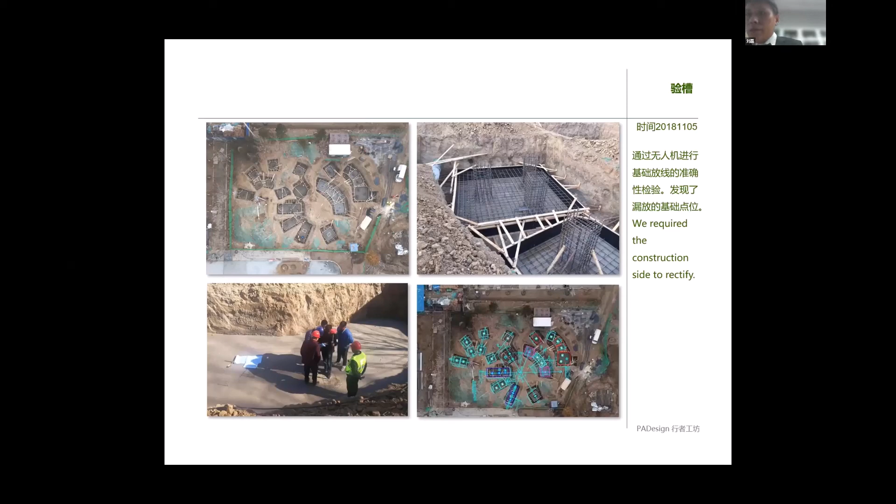We also use the UAV to survey and inspect the accuracy of the position of the foundation pit, and we found many problems and rectified them. This is, we required the construction groups to rectify the foundations.

At the same time, the processing of steel structure lasted for more than a month, and the processing of the 3D curved steel beam was very complicated. It needed a lot of artificial work, and it took workers more than another month to complete the installation of the steel framework on site, and the temperature was very low, 10 degrees below zero.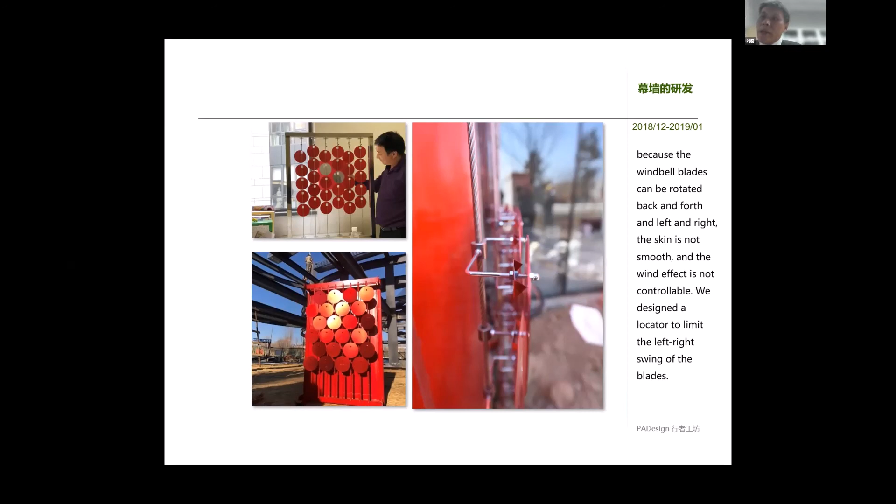At the same time, we studied the wind bell blade and found the blade can move back and forth, and also left and right. Since the skin is not smooth, we use a locator to limit movement - not to limit back and forth, but to limit the left-right sway, so it can only move back and forth.

After one month of installation, the skeleton of the building appeared beautiful, perhaps more so than after completion. After finishing the inner curtain wall, the building became a sculpture, a red sculpture. Finally, we installed the wind bell blade on it, and then the building became dynamic.

So we use a cable independent from the inner curtain wall, anchored by the roof and the basement, and we put the round blade on it. Yes, because this is a curved building, if we used rectangular blades, they would interfere with each other.

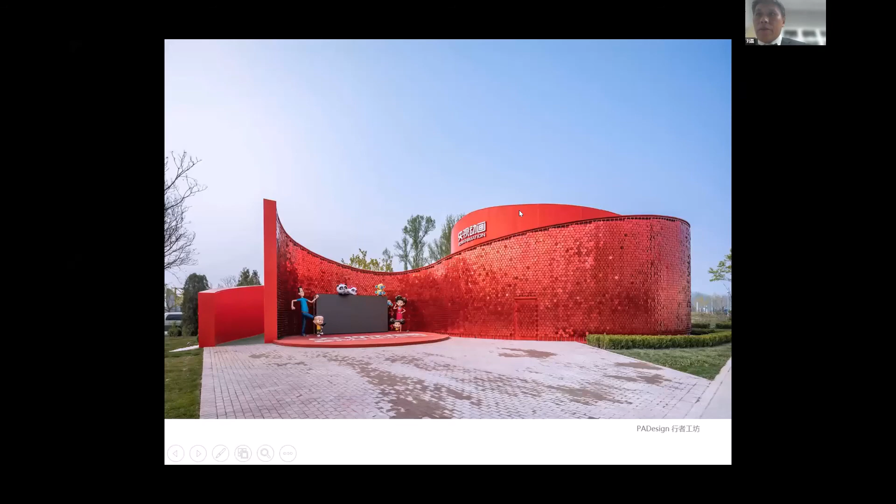This is the main elevation of this building, and we can see animation here. In the wind, the blade moves and has an expression like silk. When the wind is light, it expresses a feeling of delight.

This is also the elevation, the security guard area. This is the entrance of the ramp. This is the spiral staircase.

When the wind is strong, the feeling of this curtain wall is a little angry, I think. So this building is not stable - it's dynamic, and it can express different feelings of the nature of the wind. So it is different from traditional architecture.

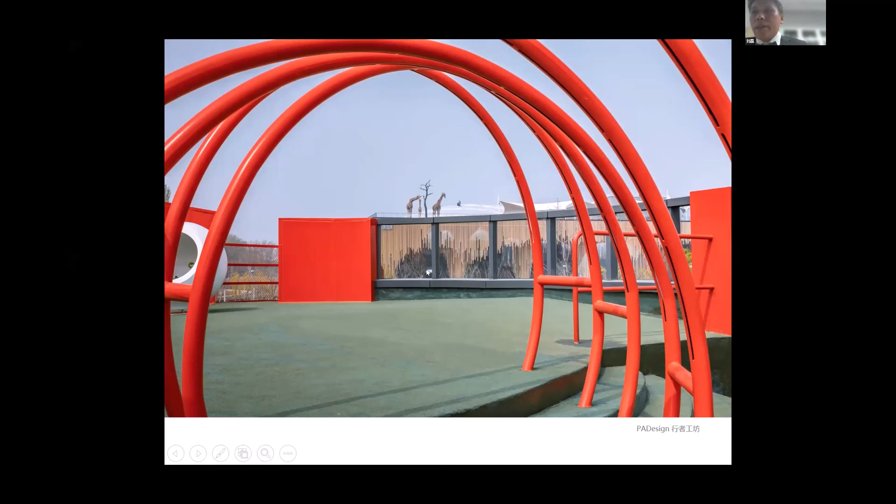Finally, a green building perhaps is not only filled with or covered with green plants, or only a passive energy-saving building, not only a low carbon or zero energy consumption building. It should also be an environmentally friendly building like this one - it's the true feeling of nature.